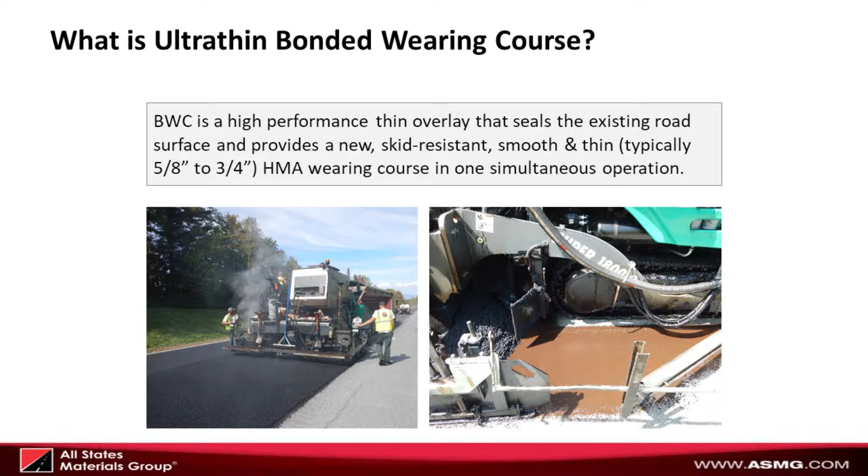As I mentioned, the process has been around for many, many years. The ultra-thin bonded wearing course is a thin overlay with a heavy application of a polymer modified emulsion, and then the original patent called for a gap graded mix. It's laid thin, that's why it's called ultra-thin bonded wearing course. Typically between 5/8 and 3/4 of an inch. In some cases it's a little more than that, depending on the agency and what the use is for.

But it's laid with a specialized paver, as you can see there, and I'll give you another picture in a minute. There's really three important components to it. One is the polymer modified emulsion, and there's certain characteristics that are very important for that as far as viscosity in order to be able to spray it. It's readily available through the emulsion manufacturers with the specifications. It's easily transported in conventional equipment.

The mix itself is produced in a hot mix plant, and it's produced with various types of binders, depending on the road volume and the conditions. And a lot of agencies now are using not only the conventional PG grades, but either polymer modified or asphalt rubber modified or whatever, depending on what the conditions are. Some of the mix plants are very adaptable because of the gradation, and some it's a little bit more difficult.

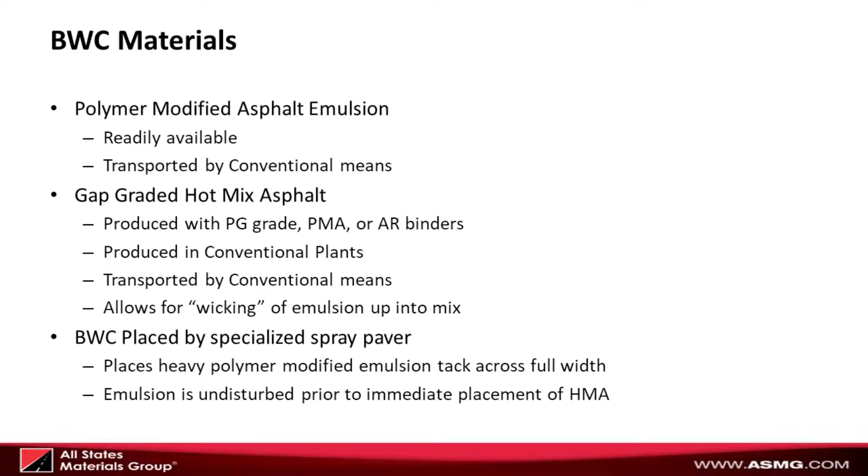And the concept really is, with the heavy emulsion, the wicking effect, and that's where we get the bonding and the long-term waterproofing and performance, really one of the keys. It's placed with a specialized paver, which is very critical. And one of the advantages of that is really two things. One is heavier application that you can put down because you don't have to worry about the tracking.

And number two, the design of the paver and the spray bar system allows for what we term the material to be unmolested or undisturbed as the paver goes across. If you do conventional tack coats with a truck, as we all know, then the equipment drives through it. And with the bonded wearing course, that doesn't happen.

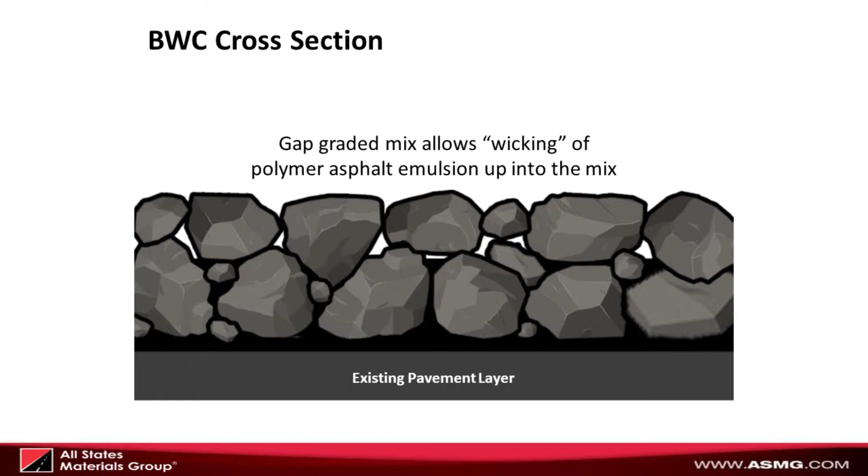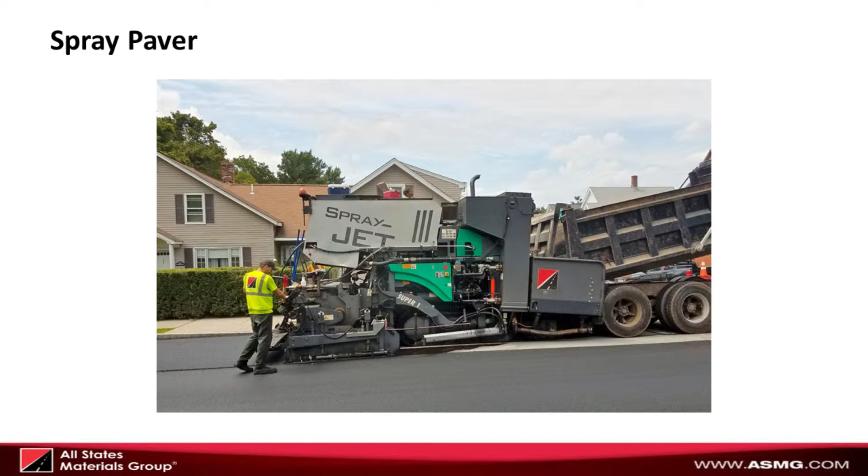This is kind of a schematic of a cross section of what it really looks like, and you can see in the slide the bottom roughly 1/3 to 1/2, the voids are totally filled, so that's the waterproofing impact that comes from it. This is the typical paver. It's a Vogele paver. There were Midland pavers on the market, and almost exclusively around the country and the world they are using the Vogeles because of the design and their capabilities.

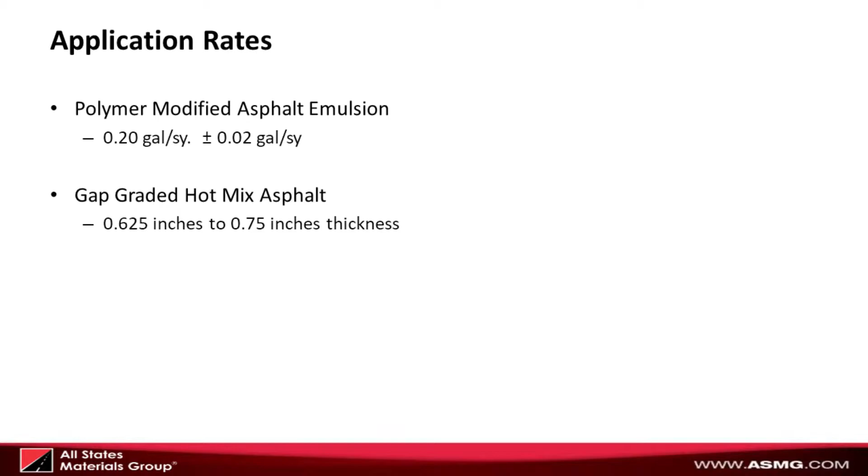Talk a little bit about the application rates. To me, that's what makes it so much different when we compare it to conventional thin overlays and tack coat. We're able to lay it pretty thin because of the mix design that's used, but more importantly, the liquid application.

So here's a little chart that basically goes through the difference between the conventional thin overlay, where we use a conventional tack coat that's typically put down between 3/100 and 1/10 of a gallon, and the bonded wearing course, where we're typically looking at 0.2 as kind of the standard, plus or minus. And that's a function of the pavement condition, if it's very dense or open graded overlay or whatever. And I've actually seen it go even beyond those extremes. So the point is the residual is what you really look at.

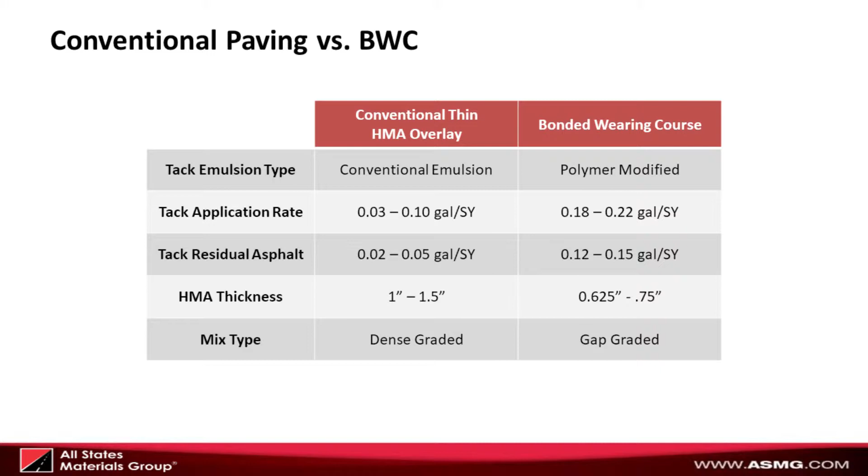And if we look at diluted tack coat, which is typically used for conventional overlays, we're really only talking about something around less than 0.05 of a gallon a square yard of residue as compared with the bonded wearing course having somewhere between 0.12 and 0.15. So that makes a big difference. You're essentially getting about 4 to 5 times more liquid to waterproof, seal, and bond the pavement down. So that's the big difference.

And I throw that up because what I want to talk about now is project selections and how we got there. And it's really a combination of things with both industry and agencies collectively working together to make things happen so that we get successful work. I'd start out by saying that when we look at project selection, certainly one of the keys is program planning and communication. And my point with this and also with the scope development and reach is it's important for industry to know what agencies are thinking.

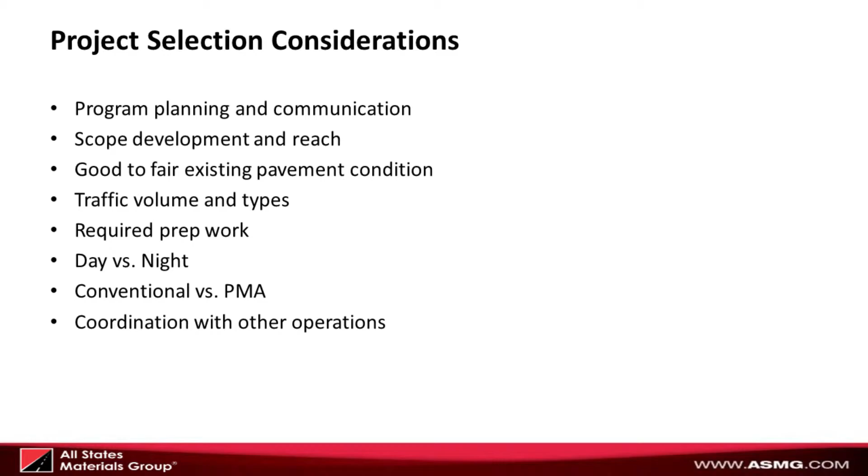We certainly always talk about good to fair pavement conditions. The selection or the type of binder that you use is a function also of the traffic and the type of traffic. We need the required prep work. There's a big difference between day and night work, and as we all know, with the interstates and the population in the urban areas today, there is more and more night work, and that takes a lot more coordination. As I mentioned before, the selection of conventional versus PMA, and I'll show you some slides later of some of the projects that we've done, and I know there'll be some discussions by some of the state agencies later with their use of some of the different binders to give better performance.

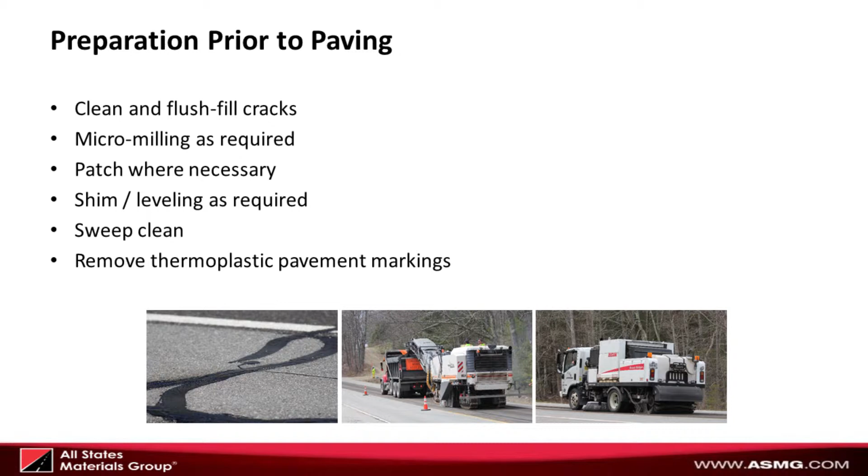And of course, the other thing is coordination with other operations, and that's why I go back to the development of the scope and reach. That really plays into that. Kind of the standard paving issues that go on. From preparation before we do the paving, these are pretty much what everybody does, and I'll just kind of skip over those. But certainly, the prep work, cleaning and crack filling, and having that done in a timely manner before the crew shows up is really important if it's a separate contract. And obviously, the pavement needs to be cleaned and leveled and shimmed and so forth.

Standard construction practices for hot mix, that's the easiest way to describe it. We need to have the proper equipment and type for sure. We need trained and experienced crews, and I think there's been a lot of work done both within the industry and through the National Center with some of the training programs and certifications that are really, really important for all of the treatment processes. There's standard industry hot mix practices, and I think we all are pretty familiar with those, and because of time I don't want to go into them. Consistent material head in front of the screed. If we really look at the paver, if we want to get ride, there's a lot of things that relate to ride. And constant paving speed is important.

The amount of head of the mix in front of the screed is important. Because as that varies up or down, the dynamics of the screed tends to go up and down. So if we really want to look at ride, which is being more and more looked at in the industry, the consistent material and the consistent paving speed are so important to overall quality.

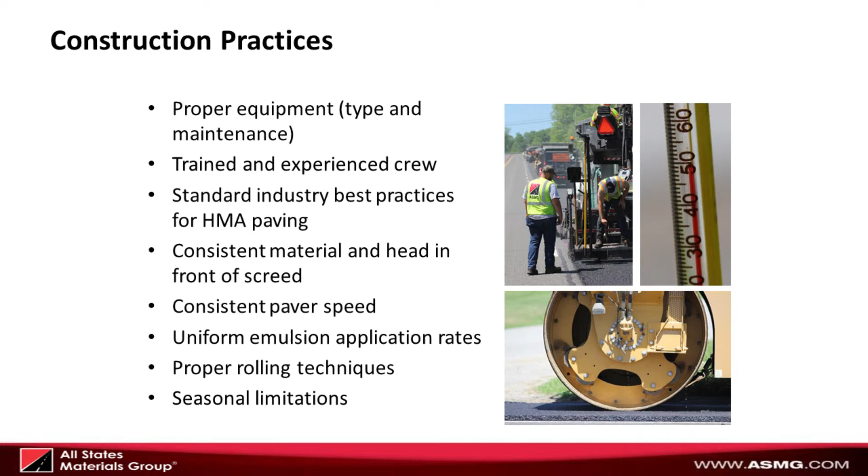The emulsion application obviously is critical, and I'll talk about that here in another minute. And there's rolling techniques. You're not really compacting, you're embedding. And of course, we have the seasonal limitations. QA practices are extremely important, and I would say that it should be a requirement.

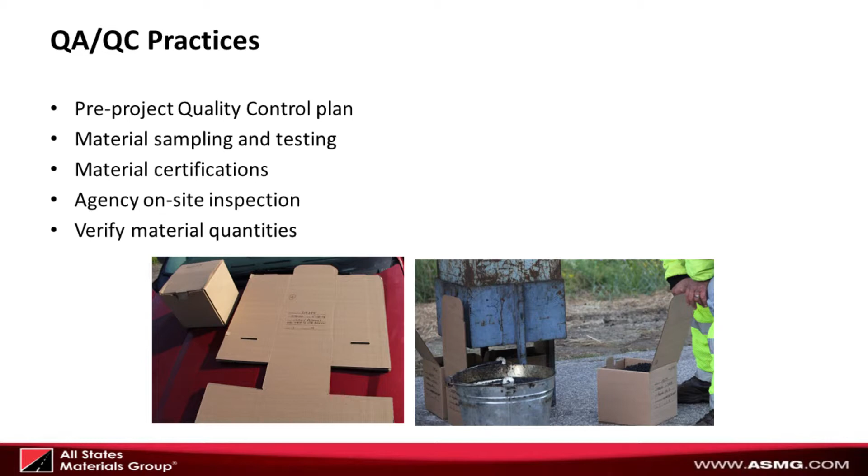If we look at the pre-project quality control plan, every project should have a plan, and it should include the material sampling and testing, material certifications, both the hot mix, the liquids, and so forth. We need agency on-site inspection, and we also need to verify quantities, which again I'll show you here in a second. These are the real key to a QC plan, and anybody doing this kind of work or any of the preservation treatments should develop a QC plan, and it should be discussed with the agency prior to commencing.

But really look at the project requirements, the materials certification. We've really moved, as Bobby pointed out earlier, with All States in looking at having a resource-approved lab so that we can do our own designs and certify the binders, the mixes, and so forth. Equipment calibration is extremely important. How you're going to do it, what process you're going to use. There are standard ASTM, and there'll be AASHTO.

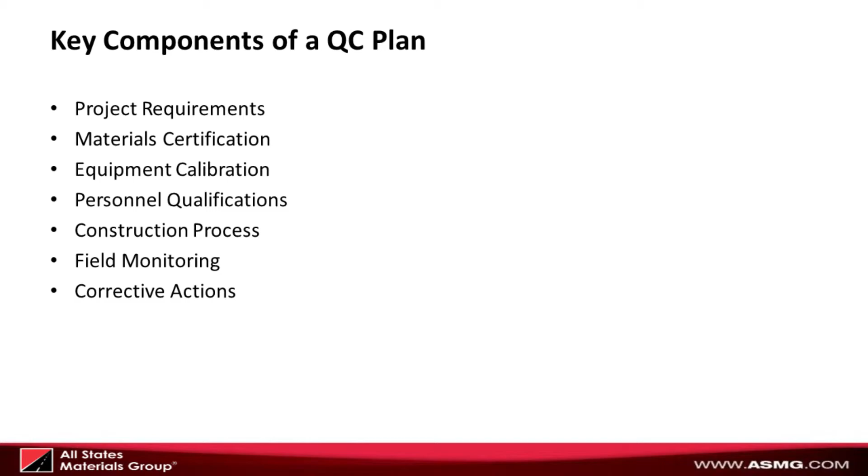Personnel qualifications, and again, I'd reiterate some of the stuff that's going on at the National Center in developing pre-qualifications for employees and training and understanding the construction process. Field monitoring, again, I think as an industry, we all say that the agency people need to know as much about what we do as we ourselves in industry know in order for inspectors to understand what's happening.

And also, within a quality control plan, we all have to admit sometimes things don't work the way we think they are. What are you going to do if things don't work? And again, that's an important part of a QC plan. How do you rectify it? How do you get back going again?

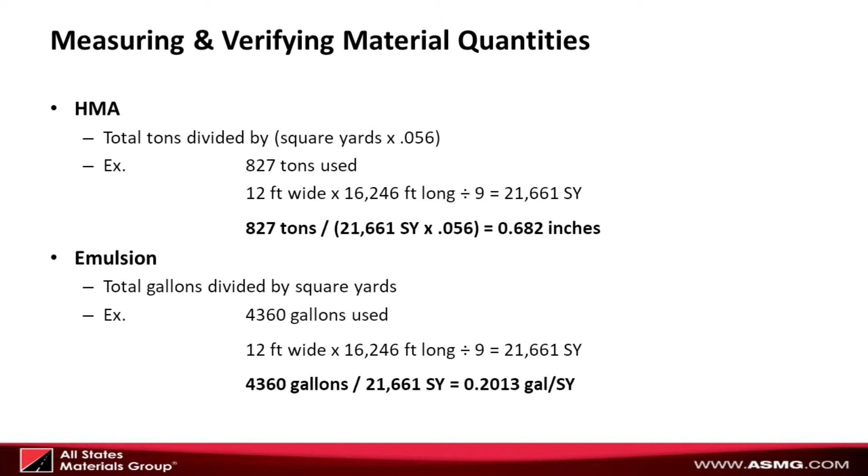This is just kind of a simple way of verifying. One of the things with the spray paver, because of the bar under the paver, sometimes it's very, very difficult, and it takes an inspector to really pay attention to what the spray bar is doing to make sure there's no clogged nozzles, which is important. But I would encourage you to use this little example: at the end of the day, or at some time during the day, look at the tons of material divided by the square yards to figure out what your yields are. And at the same time, you can do the same thing with emulsions.

And now, I'm going to quickly rattle through some examples here, and I'm going to talk as we go. These are some projects that we've been involved with, and this is one that was actually done in New Hampshire, as you can see, in 2014, and then you can see what it looked like later on. Here's the same project 2 years later. This picture was just taken within the last week.

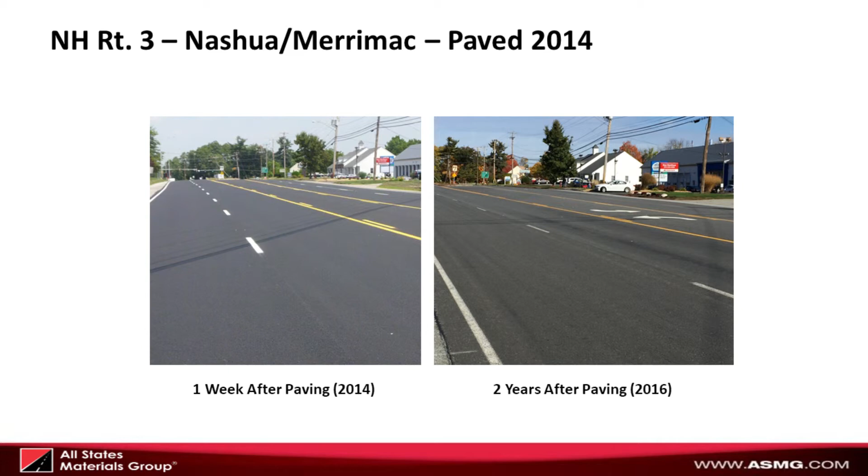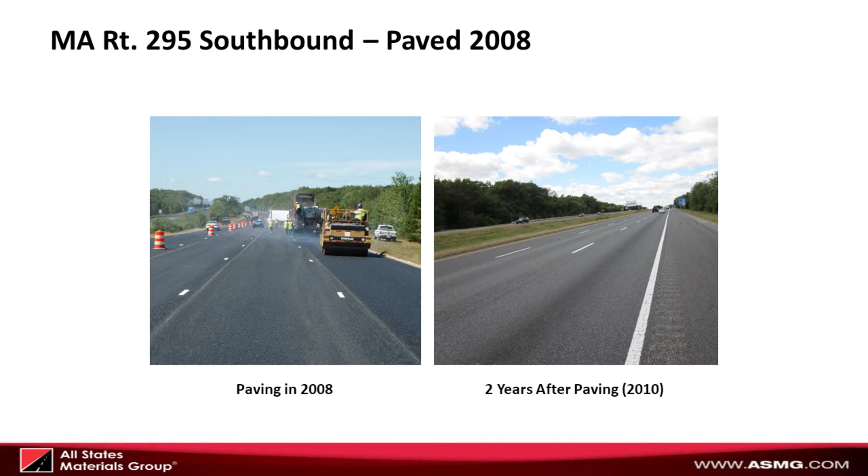Here's a project that was done in Massachusetts, and I think Ed's going to talk more about this, so I could skip through it, but it was actually placed in '08, still performing very well on I-295. Kind of whipping through here, and I think Ed's going to talk about Route 3, which is a rather interesting project where it was an overlay on a road. There were 3 different binders used: conventional, asphalt rubber, and polymer modified.

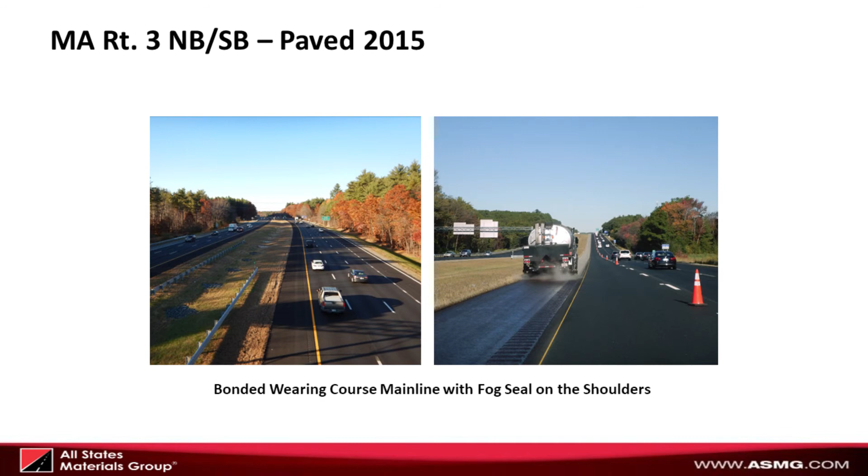And I picked this one slide really because of the treatment on the shoulders, and this happens a lot of times with thin overlays, as we ignore some of the things that are done with shoulders. And actually on this project there were several different treatments that were placed on the shoulders with fog seals in various ways, or various products, looking at how do we preserve our shoulders economically, and I'll let Ed talk about that later. So again, I want to finish.

And I just want to finish by saying that it's really communication, it's cooperation, both with us in industry and with agencies, in picking the right treatment and understanding the materials, the process, the things that we need to do, and to address any issues both before and as they occur. And more importantly, is to document and communicate the things that we do.